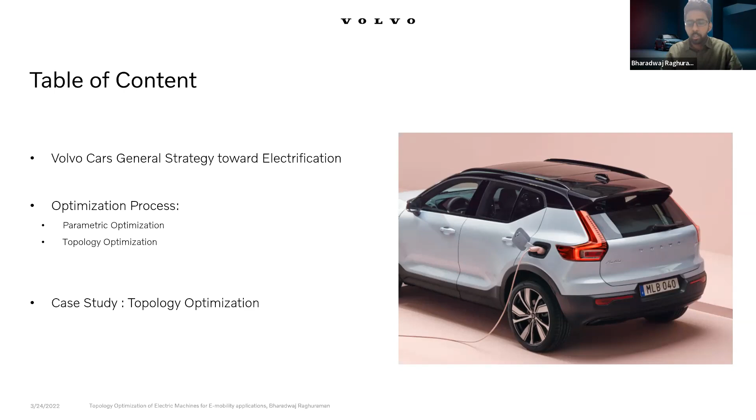Starting off with Volvo Cars' objective, we believe that we should enable everyone to be able to move in a personal, sustainable, and safe manner. And in our team and in our department, we focus mostly on the sustainable aspects of this journey.

As many of you are aware, the entire automotive industry is going through a shift with four main components: electrification, autonomous driving, connectivity, and shared mobility. We contribute heavily in the electrification part of it, where we are transforming from a traditional internal combustion engine manufacturer to a fully electric vehicle manufacturer. That requires a lot of research, and that is where JMAG is helping us to enable that.

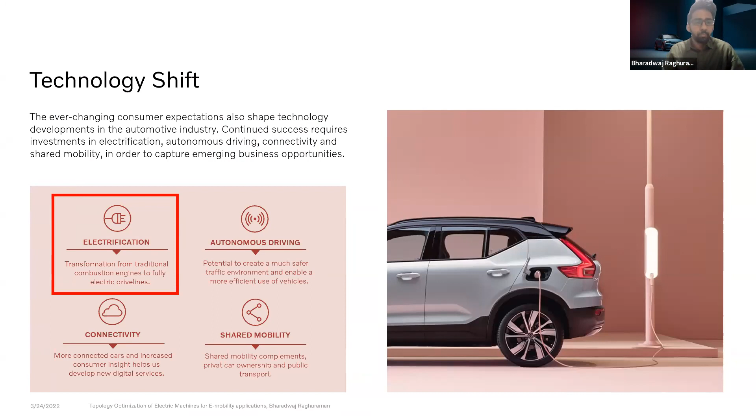In terms of what goals we have, we have some very aggressive goals. We plan to be fully electric by 2030. Within the next 3 years, we also plan to sell 50% of our sales to come from totally electric vehicles, mostly battery electric vehicles. We believe that there is no long-term future for an internal combustion engine, and hence we are making heavy investment in this regard. Also, to make sure that we are a fully sustainable company, we want to be a climate neutral company by 2040.

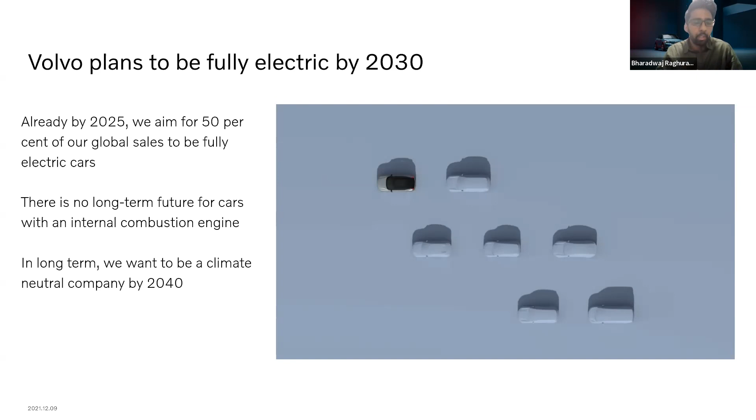To enable all of this, traction motor design is one of the key components of an electric driveline. One of the four main pillars of traction motor design is performance, efficiency, cost, and sustainability. Most of you might know that the first three, performance, efficiency, cost, are some of the things which everyone deals with when they do a design. But we at Volvo Cars believe that sustainability has to be taken up from the concept level, to make sure that we are accountable to nature on what we do as a company.

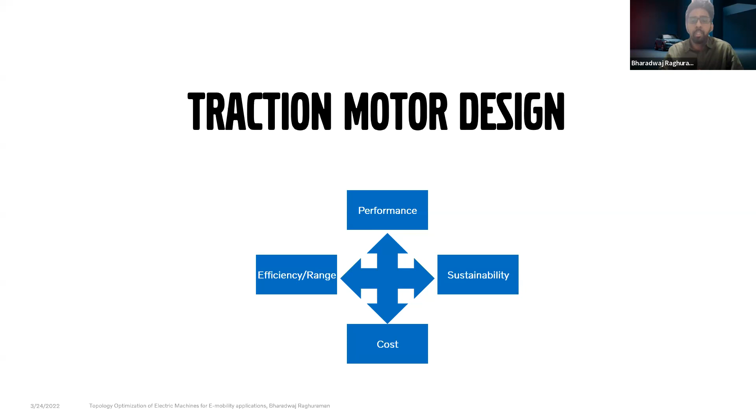When it comes to machine topologies, we are investigating several different topologies at once. For permanent magnet machines, we of course have rare earth element based permanent magnet machines, but more and more we are looking into non-rare earth permanent magnet machines. For induction machines, to make it more sustainable, we are looking at aluminum rotor cage induction machines, and if you want performance, we're also looking at copper cage induction machines. To go into much more sustainable solutions, we are also working on synchronous reluctance machines and switched reluctance machines as well.

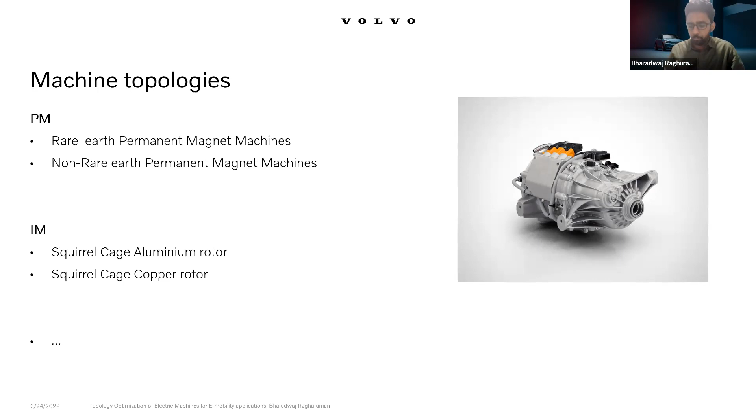Going forward, I thought I will briefly describe how an electromagnetic design process takes place within our company. What we believe in at Volvo Cars is that we need to optimize the system rather than a subcomponent of the system. Hence, all our design efforts are to make sure that at the end we have a system-optimized solution rather than a component-optimized solution.

If you can see the flow chart on the right, here you see that we get some system requirements - basically peak torque requirement, maximum speed requirement, and maximum power requirement. Once we get these system inputs, we start with what we call initial dimensioning of the machine, where we try to come up with what is the maximum packaging space which we require to fulfill these requirements, what is the DC bus voltage, which is also driven by the battery teams, and thirdly, what is the amount of current we think we might need from the inverter, which is again in collaboration with our inverter colleagues. Once we have this initial dimensioning done, we end up with a concept where we can fulfill the performance requirements, but still not everything else.

We still have to look at thermal aspects, sustainability, and most importantly the cost as well. So once we start with initial dimensioning and finish with some packaging constraints, we bring that up into a much bigger scope of work, where we also include thermal studies - where we look at what is the steady state temperatures for different drive cycles, and also look at different drive cycles in terms of efficiency and range, like WLTC cycle, US06 cycle, and so on.

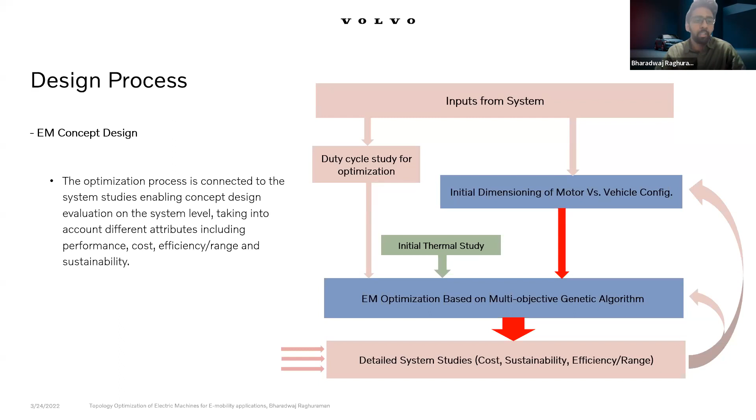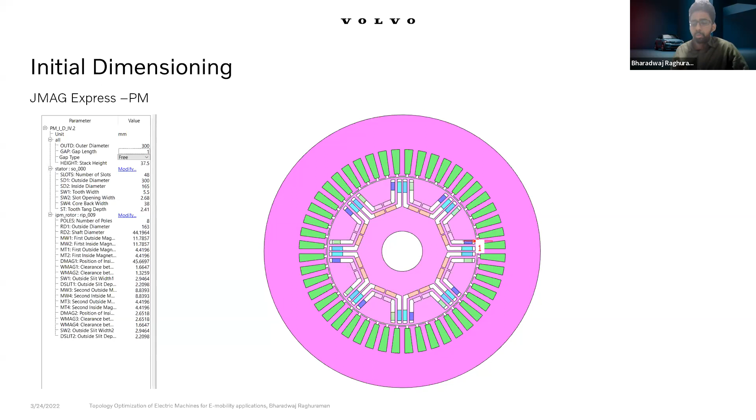Moving further, when we want to do initial dimensioning, we take the help of JMAG Express, which is quite a fast tool for us to evaluate different boundary conditions. So we might want to evaluate for a certain torque and power level, whether a PM machine is more suitable, or an induction machine is more suitable, or a SynRM machine, a synchronous reluctance machine, is more suitable. And JMAG Express, with its fast calculation methods, enables us to do that quite rapidly, so that we can come to some sort of conclusions on what inverter current levels we might require, what packaging space we might require to fulfill these requirements.

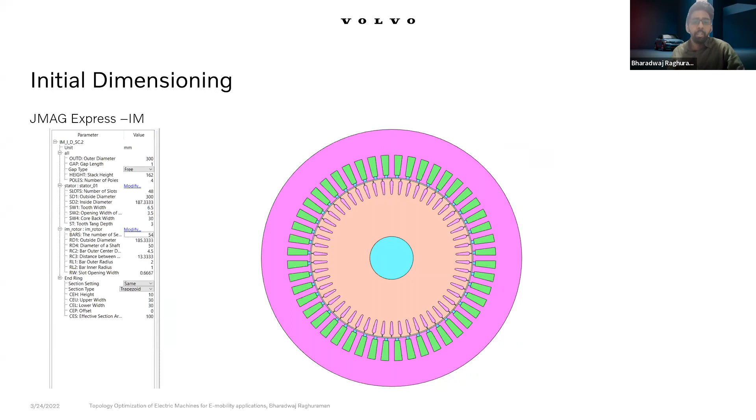And once we do initial dimensioning, as I said earlier, then we go to a detailed design concept, and that is where we use parametric optimization. Here is a flow chart of what we generally use.

So first we start with JMAG Express, as we said earlier, with a model from the initial dimensioning approach. We take the template out of JMAG Express and implement it in JMAG Designer, which is a fully finite element analysis tool. We customize all the parameters of interest to optimize, put them into an optimization process with different objectives and weights, then post-process this data, and send it out to system studies where we analyze the entire system performance and sustainability, and start over this process or take shortcuts.

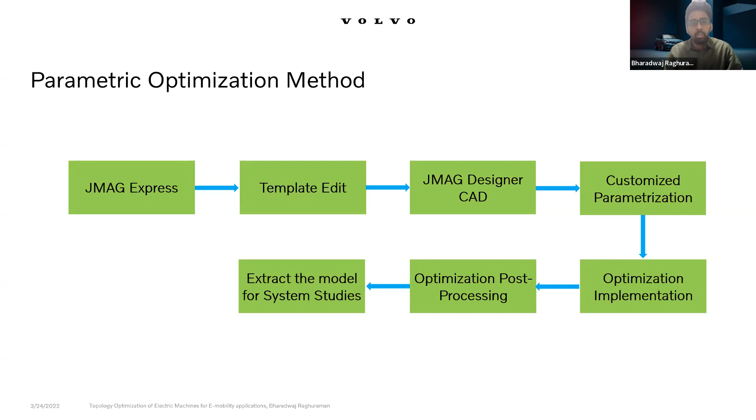To explain this a bit more, I'll give an example of what we do. Here you see we are trying to optimize a 2-layer U-shape PMSM machine, made up of rare earth metals. So we start with JMAG Express, do some initial analysis, and come up with boundary conditions in terms of length, stator outer diameter, maximum current rating, and so on. Then we use templates from JMAG Express and move over to JMAG Designer, which you see in the third picture here.

We use JMAG Designer to implement our own parameters—some come automatically with JMAG, and we further improve it by adding our own. Then we customize the parameters, both CAD parameters such as the thickness or width of the magnets or the stator outer diameter, but also the magnet grade, magnet volume, steel grade, number of poles, and so on, so we're able to look at many different designs before arriving at an optimized solution.

Once we have the parameterized model, we give objectives for optimization. As you can see, perhaps a bit small in this picture, one optimization objective is to reduce the amount of neodymium iron boron magnets we use. Second is to achieve the torque we've asked the machine to achieve. Third, especially for these U-shaped magnets, we look at the demagnetization behavior of this machine, trying to limit how much demagnetization it can take. Fourth, we try to reduce the length of the machine to make it more power dense and torque dense.

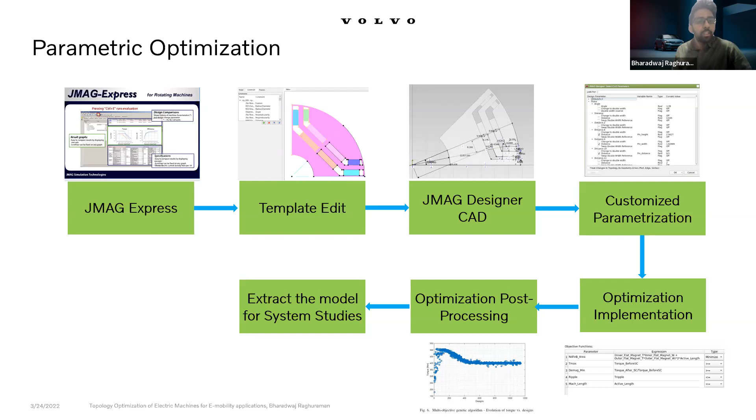So this is what we do when it comes to parametric optimization. I suppose many of you on this call also do this. What we do more than this is also employ topology optimization methods for some specific applications in our electric machine.

For the benefit of everyone here, I thought I would go over what topology optimization means. As you can see in these 4 pictures, the basic idea is you divide the region of interest into many different regions, maybe iron, maybe air, maybe permanent magnet, and so on. Then you ask the topology optimization function in JMAG to place the iron, air, and permanent magnet in such a manner that your objectives are fulfilled. This is what is called topology optimization.

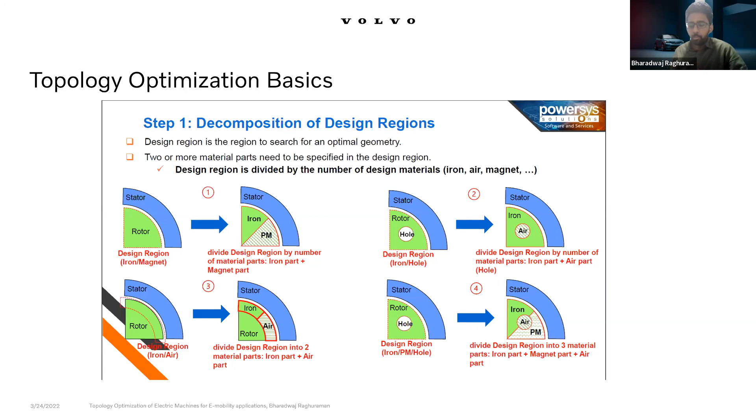Once you pair it up with something like a genetic algorithm-based topology optimization, then you see the real benefits of why we want to use topology optimization.

As an example here, you have a single layer flat magnet configuration on the left, and the red region is of interest to us so as to design a flux barrier. Here we use a genetic algorithm-based approach, and you can see the results for different generations. After 50 generations, you see some sort of design which seems rather okay, but there are still quite a lot of things to be optimized, especially the air pockets around the magnets, which become better and better as the number of generations goes up. You can see that already in generation 100, you are pretty much close to the optimal solution. So this is what topology optimization is.

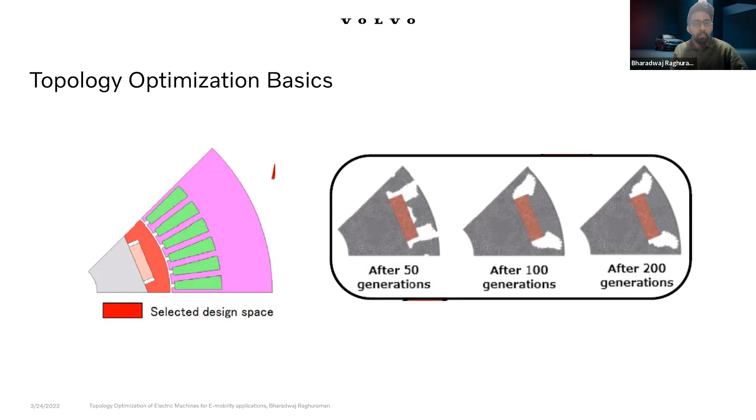Here in Volvo Cars, especially in our team, we use topology optimization for reducing the noise levels in our electric machines. Even though electric cars are less noisy compared to our combustion cars, we still want to reduce certain frequency components, and that is where we use the topology optimization methodology to achieve that.

If I can go through this flow chart, what you see is that we first start off with a 2D transient electromagnetic simulation, and then we extract what we call stator tooth forces, basically the forces acting on the teeth due to the armature reaction and the rotor flux. Once we take the frequency analysis of the stator tooth forces, we include that in a structural dynamic analysis for the complete axle, where we have the housing, the gearbox, and so on. So we also include the mechanical aspects of this machine and the surrounding in which this machine will operate.

Then we perform acoustic analysis, where we look at what is the noise level which is being generated. We validate our methods through measurement. Once we have the measurements and frequency analysis, we go back to topology optimization and optimize certain features in our electric machine.

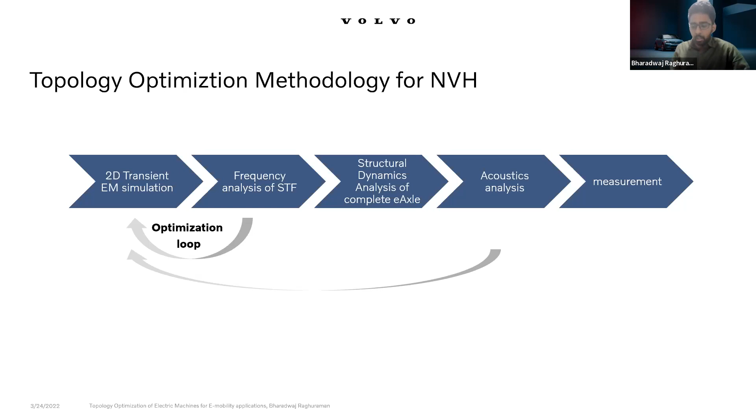As a case study, I thought I would present one of the things which we did a time back, which is also present in one of the IEEE conferences. On the right side here, you can see a 48 slot 8-pole interior permanent magnet machine. As you can see, we have a 2-layer V-shape permanent magnet machine, and in the middle we have what is called a flux barrier, marked in black. The purpose of this flux barrier is two things: one is to reduce the mechanical constraints on the magnet, and the second is to improve the noise levels of this machine.

The goals of this optimization, which we ran in JMAG, is to design this flux barrier in such a way that the motor performance is not disturbed, and it should not be more than 2%, but 2% is still a very high margin. We prefer that the motor performance is not degraded by more than 1%.

Since this is a 48 slot 8-pole machine, we will have the 48th temporal order, and then other orders as well, like the 8th order, the 24th order, and so on. Mainly our target is to reduce the 48th order harmonics, and also reduce all the other main harmonics present in this machine. We give different weights based on what we are trying to achieve — as you can see, weights of 2, 5, 4, and 1 based on what we want to achieve in this optimization.

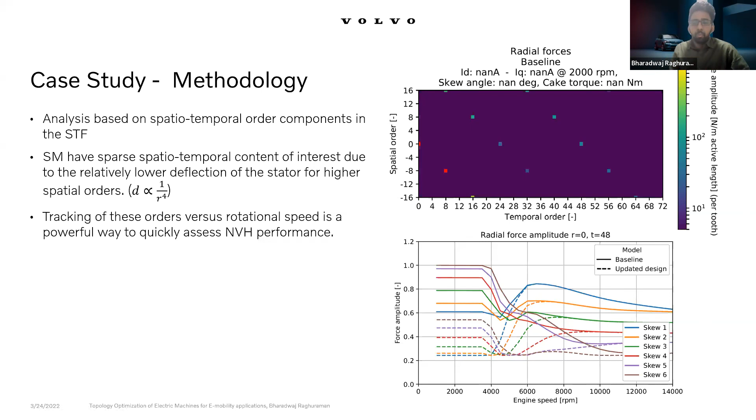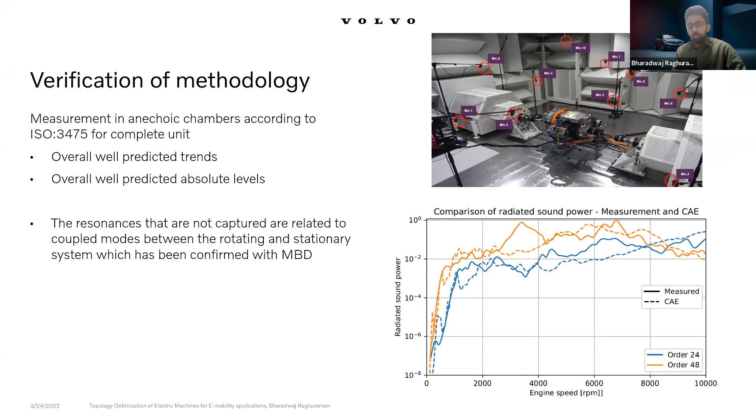So coming back to the problem which we had, which is to reduce order 48 and also to reduce the sum of the other tooth forces, I would like to show you some results.

We started with this design as the initial seed for the optimization, and after a couple thousand generations, we ended up with this design, which is quite organic in nature. This kind of optimization method, only possible due to topology optimization, helped us reduce our 48th temporal order by up to 50%, and also the tangential order as well.

And here on the right, you can see that we have 6 segments as well. On top of topology optimization, we also used JMAG to analyze different skew segments, what the effects of different skew segments are, and so on.

And here you see the effect of this change through topology optimization on the noise levels, on the force levels, which will translate into noise levels.

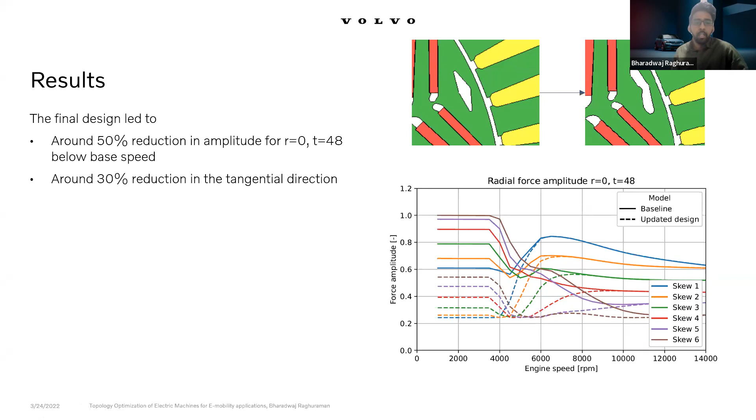Further on, what we could also see is that by doing this topology optimization, we were able to stay within 1% of performance degradation, and we were able to even achieve 5 dB of noise reduction, making sure that our vehicles are much better compared to what we had designed earlier.

I think this is one of the main aspects of topology optimization, where the results can be quite interesting and can lead to quite drastic changes in the problems you're trying to solve.

So I guess this method is not used in JMAG. Yes, so for the moment, we have not implemented this method into JMAG. So into JMAG, you only have a SIMP and on-off method. Yeah.